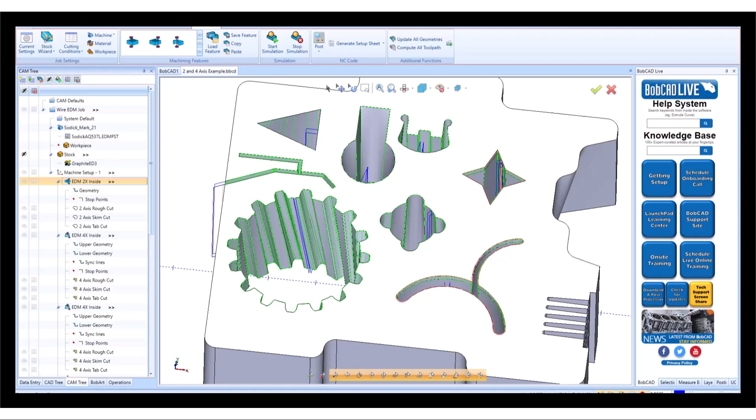Many of you don't know this, but BobCAD started out as a Wire EDM solution back in 1984. And today, we're still one of the best Wire EDM solutions in the market. Let's find out why.

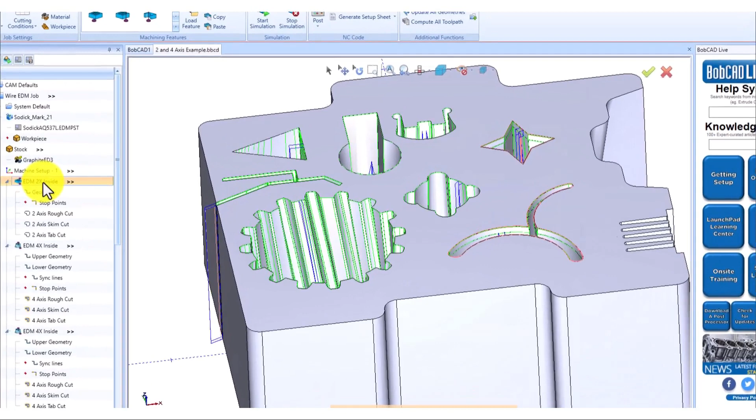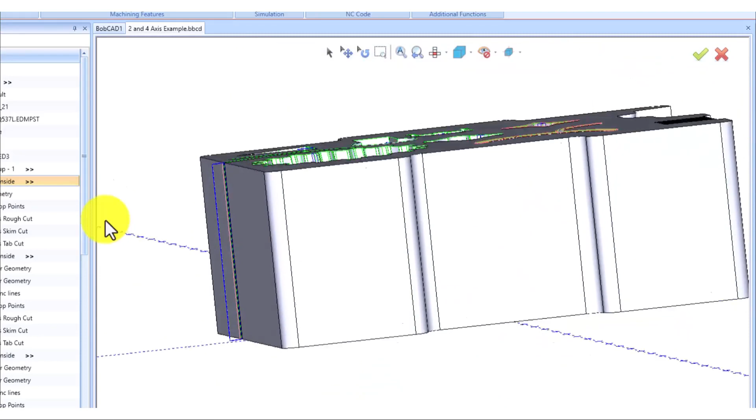Ease of use. Our user-friendly cam wizards are designed to empower you to take on any project, no matter the complexity. Whether it's an open or a closed shape, if it has a taper, or even if it's a fourth axis operation with different shapes on top and bottom, we are confident that you will be able to program it with ease. Our cam wizards will guide you through the programming process with clear images that reflect the function of each feature, making the learning process more manageable.

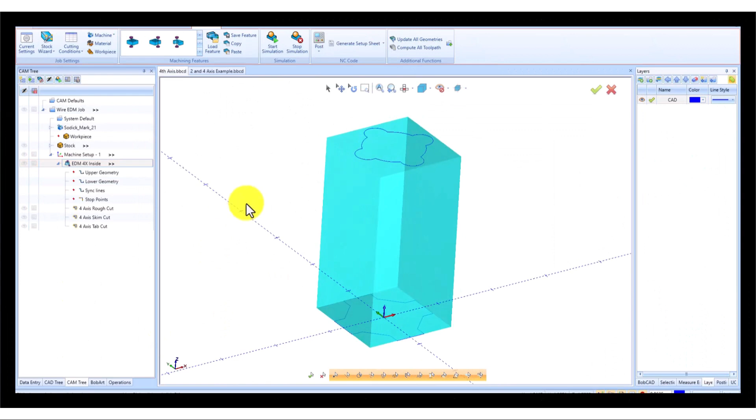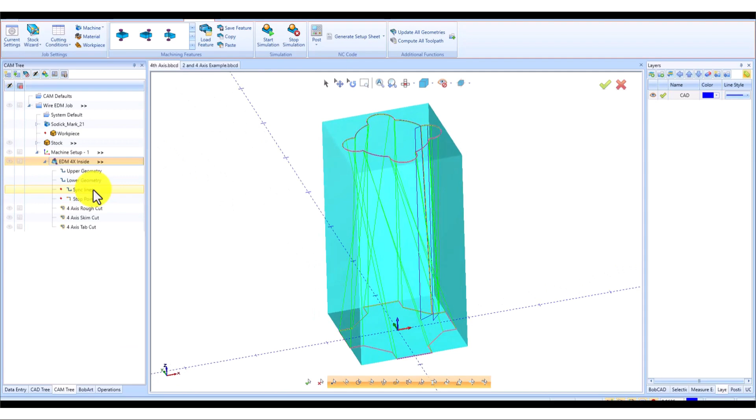Automatic fourth axis synchronization. If you use prior versions of BobCAD-CAM, you're familiar with the challenges of aligning geometry to program fourth axis wire parts. Ensuring that the top and the bottom parts were synchronized was very time-consuming. We heard your feedback, and today, BobCAD will automatically synchronize your geometry, dramatically reducing your programming time, allowing you to focus on what really matters: cutting parts.

Now, you can set up synchronization lines and stop points with ease. Thanks to these tools, you can ensure a flawless fourth axis programming every single time.

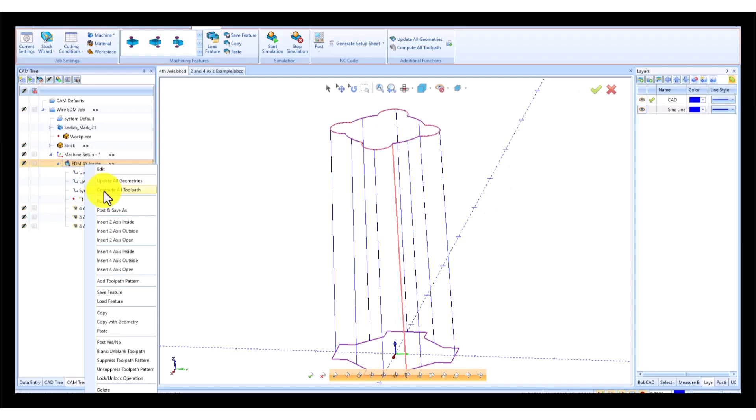Templates. As you know, Wire EDM machines have specific power and speed settings. Some of our machines already include this information, but if you want to set up your own, now you can save all your power settings as a template and apply it to any other projects.

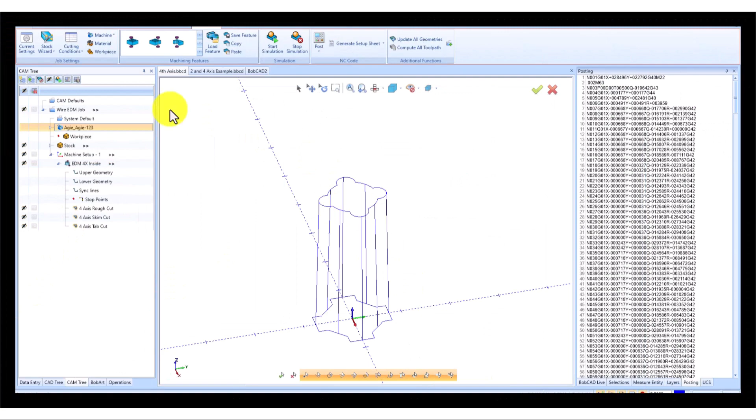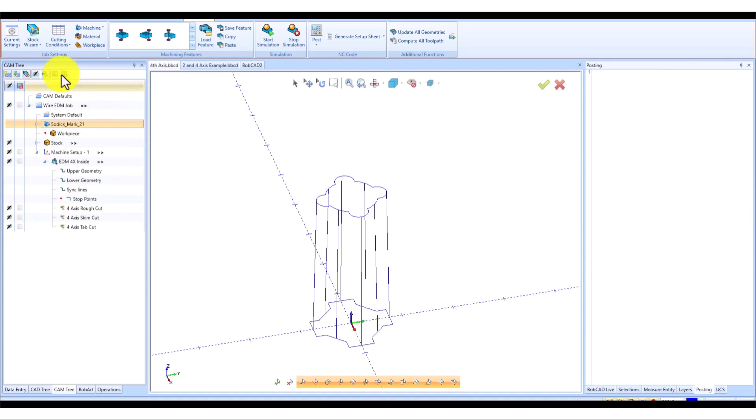Finally, post-processors. We are one of the few systems in the market that includes a post-processor with our maintenance. As a BobCAD customer, you have access to our proven post library, or you can work with our post department to fine-tune all the details so your machine can run as it should.